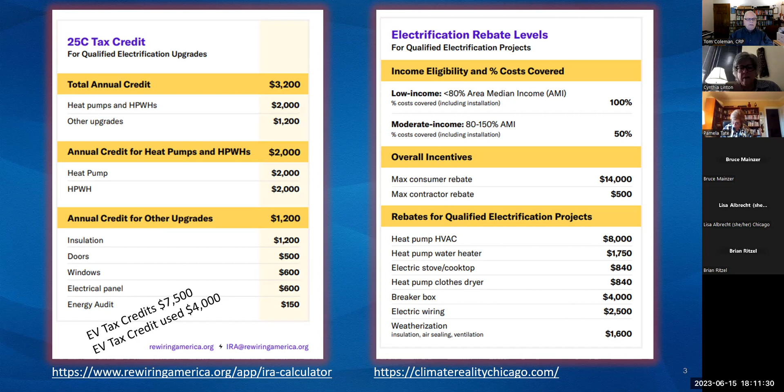Let me mention Chris Murphy as well. She's an expert on all of these things. I'm not sure she could be here tonight because I think she's doing a presentation. But when it comes to tax credits for heat pumps and things, in addition to what Derek and I will be talking about tonight, Chris Murphy can answer a lot of these questions. She's really good. So let's start with emissions.

You can see the breakdown as of 2021 from the EPA, with residential and commercial home buildings at 13%. Actually it's higher if you take the electricity generation and apply it to buildings—I think it takes it up to around 35%. So your home is critical. Your car is critical at around 29%. And electric generation is huge, and industry and agriculture, of course, is huge.

The real important thing about agriculture is that it has the capability, along with agroforestry and things like that, to be a sink instead of a net emitter. We want this to be able to capture some of the emissions from other areas.

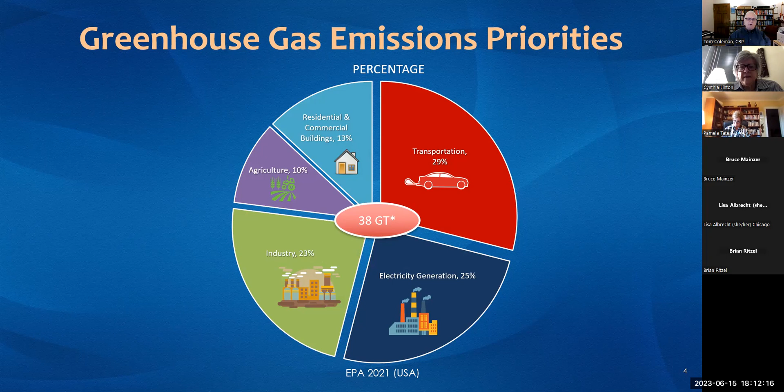So with that said, this is a breakdown of your home. You can see 29% for heating energy use, 17% for cooling—so you can see it's huge. Water heating 14%, appliances 13%, lighting 12%, other 11%, and 4% for electronics. So the home is huge.

So you think about planning ahead—what is it that you want to do next? I'm going to talk about 13 years worth of things we started doing in 2010. Hopefully you can plan it out better than I did, because many times we did things based on 'must have.'

But if your car is, say, 12 years old, maybe it's on its way out, you want to be planning for what you might do in terms of moving to an electric. Same thing with your stove and different things like that. So some of it's about what's urgent, the age of the appliance, whether it's gas or electric now. Should you do efficiency first, like insulation, windows and doors? And then when it comes to energy, do you want to do solar before your electric vehicle? We didn't do it that way, but it kind of makes sense to get off the grid, or mostly off the grid, with solar first, and then move your electric car onto that.

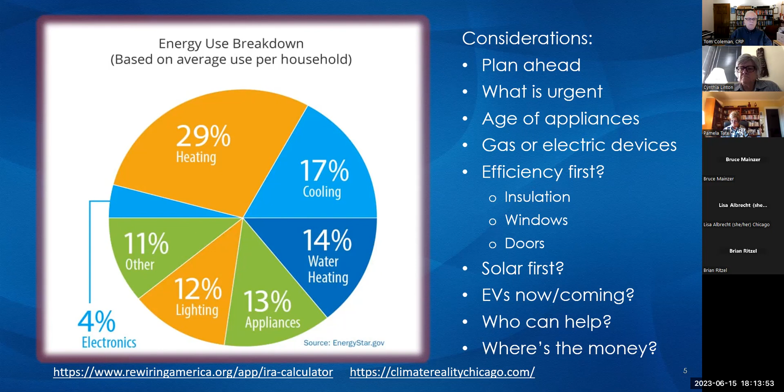Who can help? Well, obviously I can help, and Derek and members of Climate Reality can help. Certainly Christina Murphy is an expert, but also Rewiring America. I'll get the link at the bottom. We'll get these slides out to you, and Climate Reality.

So our 13-year transition kind of looked like this. In 2010, we replaced 20 windows in the house with Windows World. I've got mixed feelings about that company, but we did it, and it was important. Light bulbs up to LED.

We did a plug-in hybrid in 2011, a Chevy Volt. The good news about that is it cuts emissions almost in half versus a gasoline car. So that was a really good move in 2011.

And in 2017, I went to a zero emission vehicle. Basically we call them EVs, but there's a little difference between plug-in hybrid and zero emission. That was a Chevy Bolt EV. It was a very cost-effective vehicle, less than $40,000 at the time, and now they're like less than $30,000, or around $30,000.

We did shower heads in 2018, insulation. We had a home energy audit. The north side of our house was just leaking heat, and obviously air conditioning was just terrible, through the roof. We put cellulose insulation in the walls, some of the walls, and certainly in the attic. That was critical. It was so bad in our house.

Our house is from 1989, but they put cheap things in houses many times, really to keep costs down, and you pay for it over the long term. For example, we have a bath upstairs, and routinely the water would freeze in the drain. That's how bad things were.

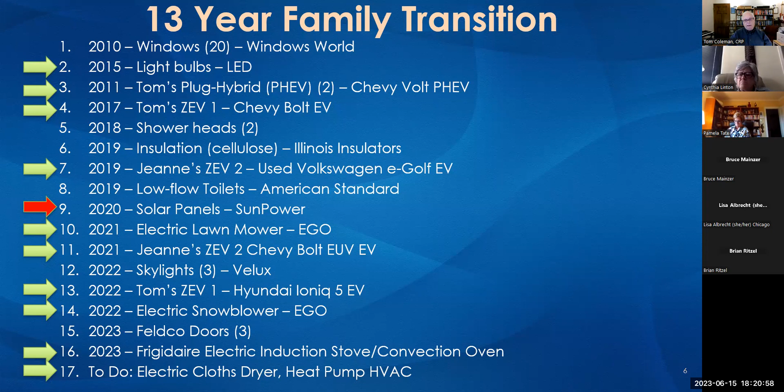So in 2020, when I found out about that, I was very upset. I wanted to save money, and I wanted to get off Naperville coal. I was going to wait around for Naperville to sign new contracts, which we're still waiting for. I wanted to get rid of as much of that as possible.

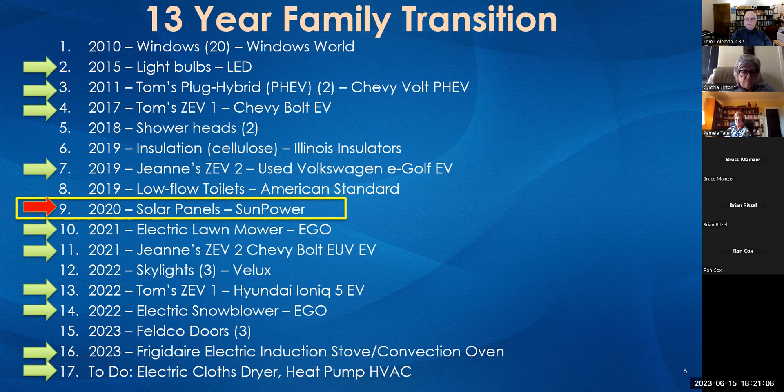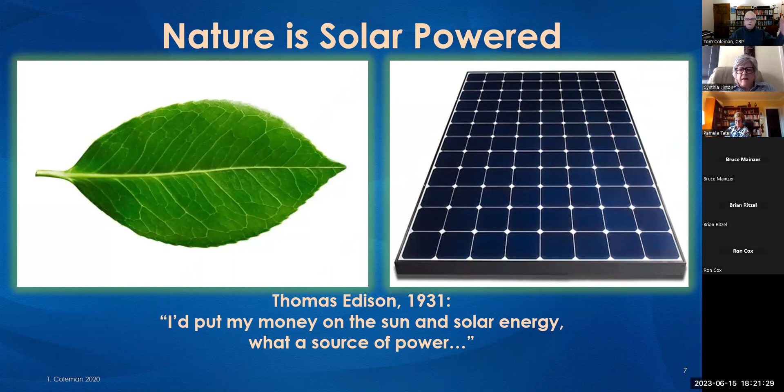So the thing I like about wind and solar, it's not just that it's renewable, it's very compatible with nature. So we look at a leaf, and then we look at a solar panel on the right, there's a lot in common there and a lot of synergy there versus drilling for fossil fuels and burning them and everything else. So I'll just say that.

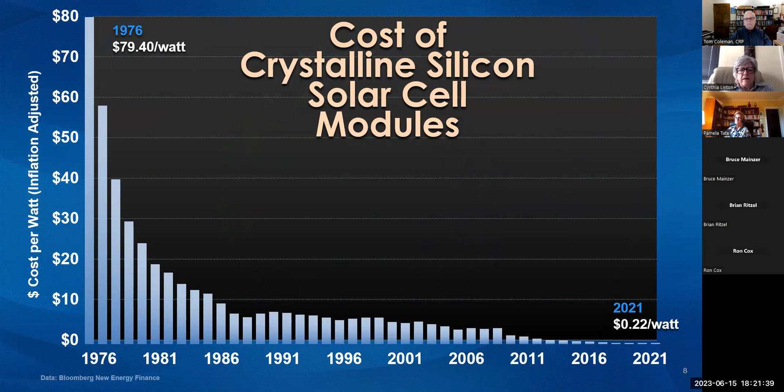And the cost of solar panels have dropped dramatically, as you can see in this picture here. So if you looked at them 5 years ago or 10 years ago, check it out again, because they're really coming down, and there's a lot of incentives as well.

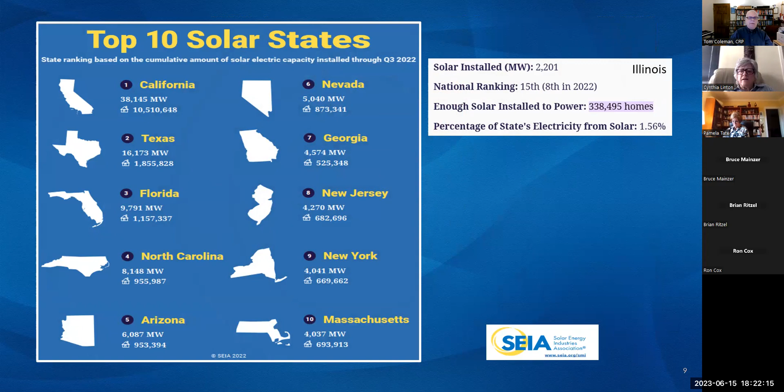And that's one thing that everybody worries about or is concerned about, money. So I think as a climate organization, yeah, we got to talk about climate, but I think we need to talk about money. And Illinois is like number 15 on the list. So we've got a ways to go to catch up to these other states that are moving right along.

Two approaches: rooftop solar and community solar. With rooftop, you can get 100% of your energy, certainly 70 to 95%, depending on your home and how much shade and tree cover you have, because trees will reduce the sun's power. Also, the way the home faces is important. Fortunately, our home faces east and west, so when the sun comes up and goes down on the other side, we have panels on both sides. Many of the things I talked about earlier help with home efficiency so we're not wasting energy.

Community solar, at the bottom, is an option if you can't do rooftop solar because of the way your home or trees are situated, and certainly you don't want to cut trees down. You can go many places for community solar and get about a 20% discount by sharing a solar farm. Now, in some places you can't do that. I don't think you can do that in Naperville because it's part of a muni, which is separate from a ComEd or an Ameren.

So check that out. Certainly it's better to go rooftop solar because a lot of people are concerned about the grid. Is the grid going to be able to take all the stress of going with electric cars and all of these kinds of things?

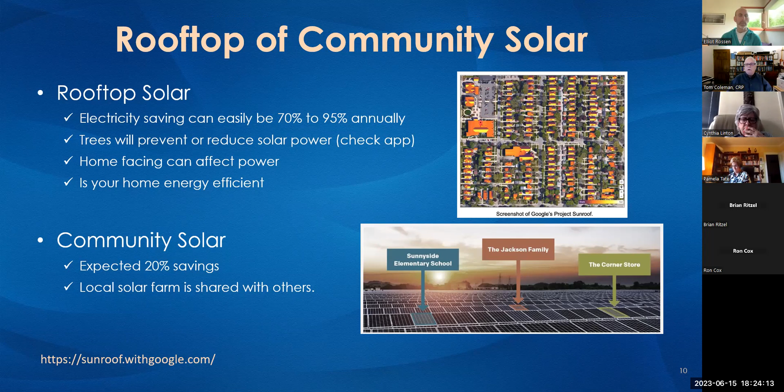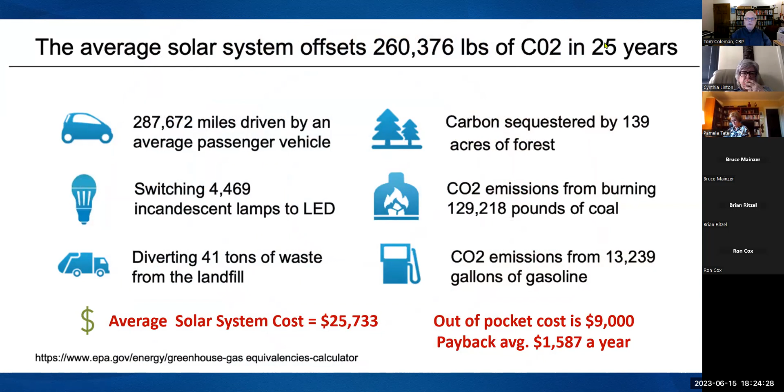With that said, the average solar system is going to offset about 260,000 pounds of CO2 over 25 years, and that's a lot. It's carbon sequestration equivalent to a massive 139 acres of forest, or emissions from burning 129,000 pounds of coal. You can see the statistics here, it's worth looking at.

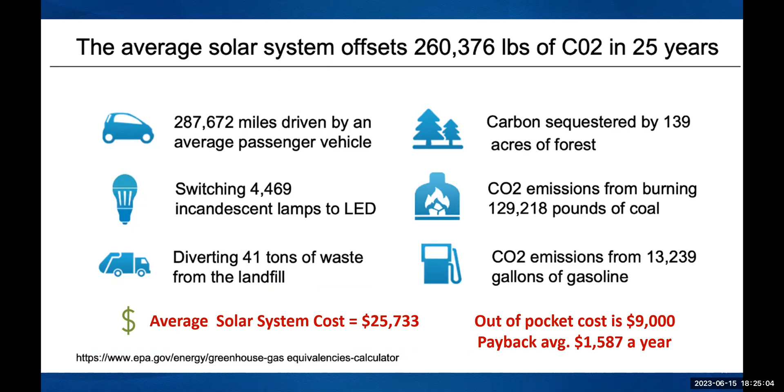A rooftop system is about $25,000, of which you might have to pay about $9,000 out of pocket. The average payback is about $1,500 a year, so it's about a 6 or 7 year payback. But the payback is gigantic as soon as you make the investment and do it. It's certainly similar to the investment of, say, remodeling a kitchen, but the good news is there's an ROI to it.

So how does this thing work? Well, you put the panel on the roof.

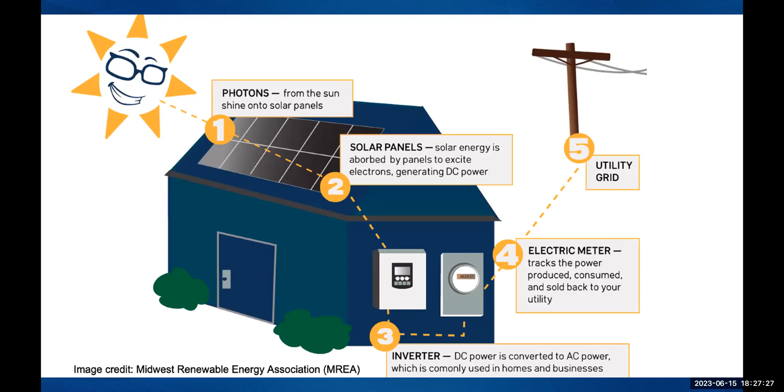This is from Christina Murphy, a system on the left where they only get 55% of their energy from solar. Let's say their upfront cost for that smaller system is $19,000. They get a $5,700 federal tax credit, and from Illinois, this thing called SREC, which is basically fronting you money of savings to help the state reach its energy objectives, about $6,900. There are also programs where you can get group buys, which I didn't do, but they exist. So their final cost, in this particular case on the left, is $5,900.

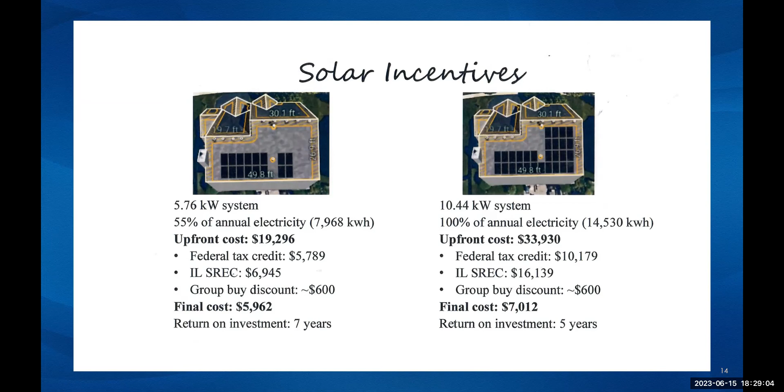So it could be you have trees or shade, meaning you can't get 100% of your power. On the right, this individual has a bigger system and is getting virtually all their power, except maybe in the evening, producing during the day. You can see their system is more expensive, but their federal tax credit, Illinois SREC, and group discount are all more. So their final cost is $7,000, which isn't a lot more than the house on the left. I think the house on the left couldn't do more because of how the house is, or trees. So obviously you want as big a system as you can get.

The process I went through looked like the top there. There's a home visit, you pick a company — it could be Lisa or some other company — and they do a site visit installation. They then do systems engineering and roof loading analysis, and prepare your municipal permits, because you need a permit. You have to wait for the permit, which took 4 or 5 weeks. Then the solar system was installed, and final inspection occurred. I didn't have to worry about the second row, HOAs, since we didn't have one. And submitting applications for connection, I submitted to the city of Naperville, which has its own power company. So it's really pretty straightforward.

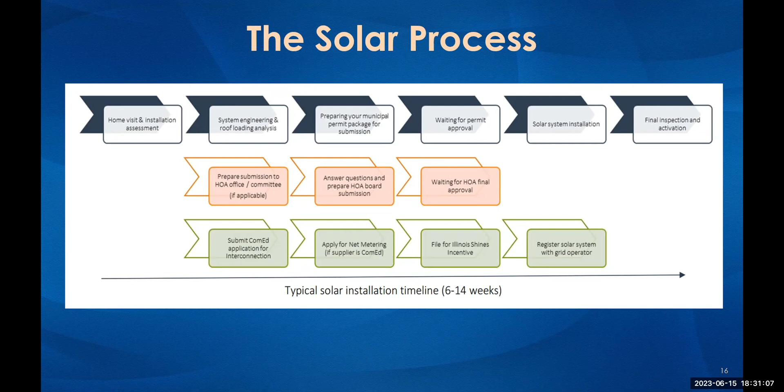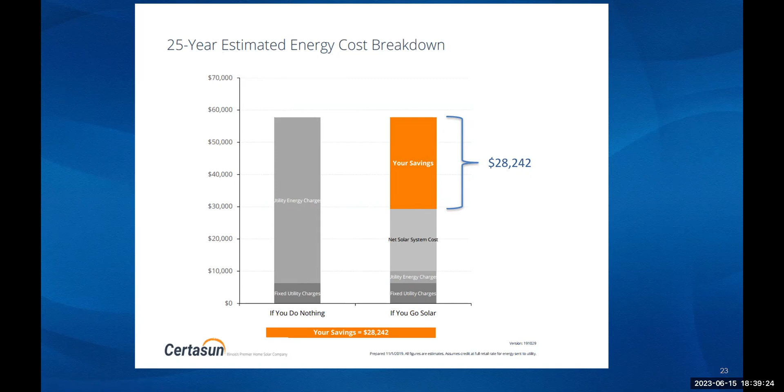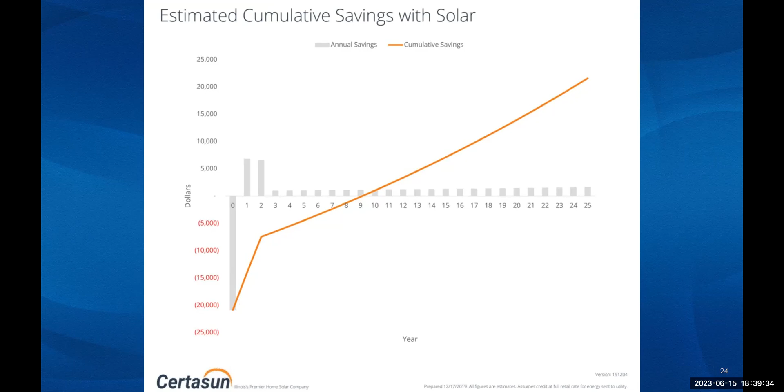And this is how much I spent. This is fixed costs you can't avoid. It was about $20,000 here in net solar system costs, which saved us over time about $1,200 to $1,300 or more a year. So the payback is around 6 or 7 years. The projection at the time this was implemented was about 8 to 9 years. Actually, I think we're doing better than that.

Now, unlike some cities, that $18 goes against my utility bill, so it pays for water and refuse and all of those things. In other places, it would be a credit against future months, and there would be a sync up at the end of the year.

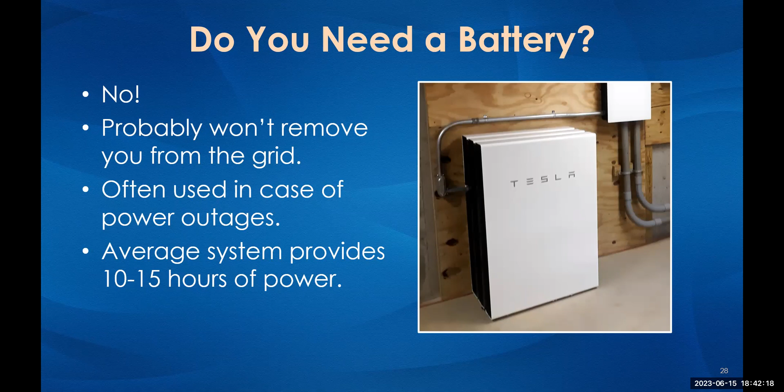Do you need a battery? Absolutely not. We don't. The city of Naperville has a highly dependable electric grid, so we didn't feel we needed it. We pull from the grid or we sell to the grid. But you can if you want to. Some people do that, and it does help for their power to actually get more, and it also helps during, say, a power outage. But it's probably not going to remove you from the grid, and it's good to be on the grid. If the grid were to go down, the systems would provide the batteries somewhere around 10 to 15 hours of power.

Can y'all see that? Yep. All right. Thanks, Tom. I think I recognize some of the faces here from when I was giving a talk back in January, so this is a follow-up to that talk. I included some of the content I talked about in January, just to follow through on it and help provide some context for what we've done so far.

So last time I talked about our process of installing solar panels, and then we had just begun the process of electrifying everything else, specifically the heating in our home. That's mostly what I'm going to focus on today, but it's great to hear Tom's experience, because it overlaps quite a bit with ours. So it's really good to hear that. It's validating. So I'll dive right in.

So I live in Oak Park. This is going to be a talk about heat pumps. This is just a little bit about me. I do data and tech work here in Chicago. I run a couple of organizations, a nonprofit called Chi-Hacknight, and I have a civic tech consulting company. And then in the last year I've joined the Oak Park Climate Action Network, which is how I think I know Pam, who invited me to speak back in January.

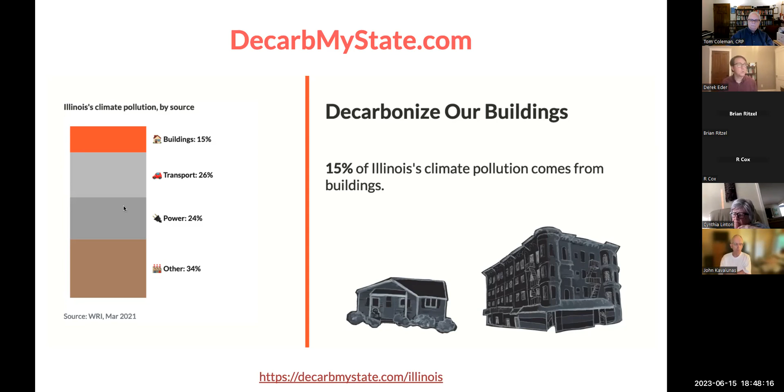But there's no one right way to do it. It also varies region to region. There's actually quite a lot of electric heating happening in the United States, especially in the southern parts of the country, and also in the Northwest, which I thought was surprising.

I've learned that especially HVAC professionals are really tried and true to natural gas. They love it - they think it's the best, nothing could beat it for reliability and things like that. So there's a culture there that we're up against.

Tom, you mentioned your HVAC installer talked you out of going with heat pumps - I've experienced that as well. I think a lot of that is just because of what's here. The numbers show it's not just the majority, it's something like 80 or 90% of at least Oak Park homes are gas heated. So there's a lot of work to do, and you look to your neighbor and they're probably using gas, so you feel like a bit of an outlier if you're trying to switch to electric.

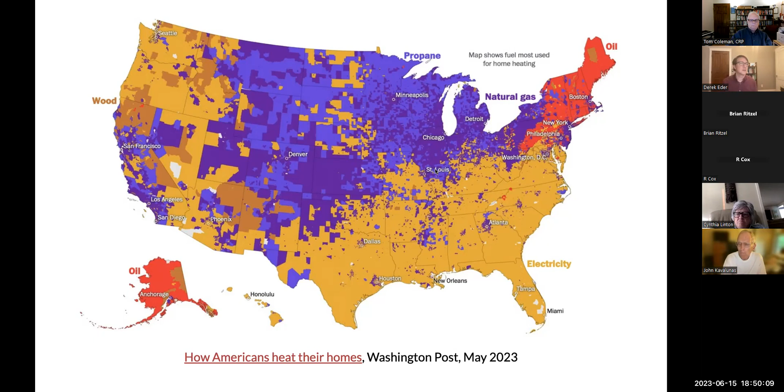But that is one of the challenges of our age, because everyone will have to. If we are actually going to get down to net zero emissions, we will all have to do what I've done and some of the things Tom's done. So it's worth putting that national context out there as well.

So again, I'm all about clean electrification, and you've probably heard this pitch before, but that's where I'm coming from. What brings me here is I've written several blog posts now, and as I've been doing this work on our home, I've been documenting it. All the things I'm talking about, I go into pretty detailed explanations of on my blog, on my website, derekeder.com. I'll share some links at the end along with these slides. But this talk is based on what I've already written about.

So I'm going to talk about heat pumps. It's first worth answering the question: what is a heat pump? A lot of people think it's just electric heating, and that's kind of right, but not quite right. Heat pumps don't generate heat - they move heat. That's a pretty important distinction because it's much more efficient moving heat instead of creating it. Your toaster, for example, creates heat - you see those little coils light up. That's electric, but it's actually really inefficient.

That's usually what people are thinking of when they say don't go electric, it'll be too expensive - they're basing it on electric resistance heating, which is essentially the same technology that powers your toaster or your hair dryer. Heat pumps are completely different technology. In fact, you probably already have one, you just maybe don't know it. If you have central cooling, an air conditioner, it's essentially using the same technology as a heat pump.

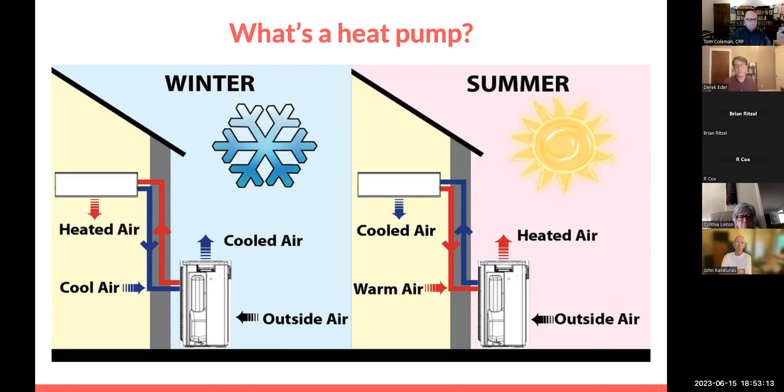For our home, they heat up and cool - it's the same device. We replaced our old furnace and air conditioning unit with just a heat pump unit that does both. So that's worth talking a little bit about what's going on here.

I've learned pretty quickly that heat pumps in Chicago are actually the hardest thing when it comes to electrification - the biggest challenge. I'll talk a little about why, at least for us.

This is our old furnace. It's a gas furnace, 125,000 BTUs an hour. I learned very quickly you can't just get a 125,000 BTU heat pump - they don't make them with that many BTUs residentially available. They keep getting better and bigger, but for now that just doesn't exist.

So we talked to some people and realized the first thing we had to do - and I talked about this last time - is put our home on an energy diet. We have to figure out how to reduce that number from 125,000 to something more manageable, because heat pumps come in sizes like 40,000 or 20,000 BTUs. Yes, I could have just installed 4 heat pumps right off the get-go, but that's an expensive proposition. There was some low-hanging fruit as far as efficiency that we were able to do so we didn't need that.

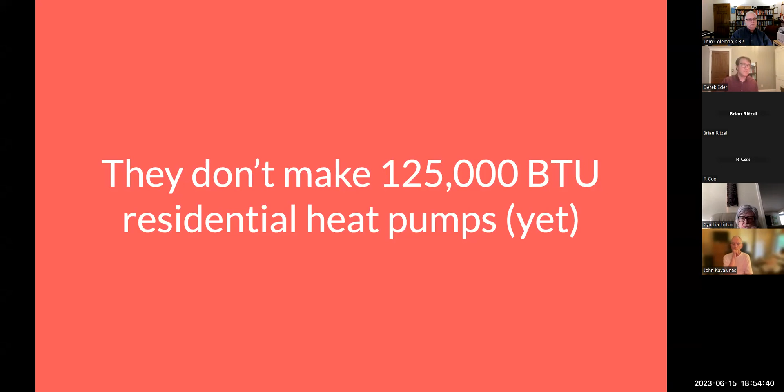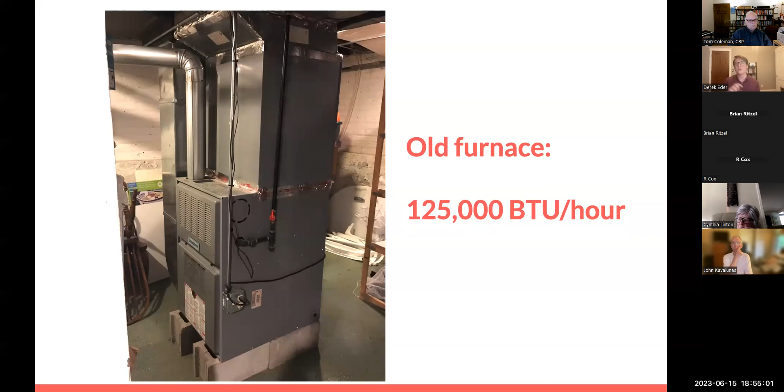It's also worth noting our gas furnace is 80% efficient, so right off the bat 25,000 of those BTUs are wasted. So our home actually only needed 100,000 BTUs. Heat pumps are very efficient, so you can essentially take their sticker value as their actual heating output, as opposed to a gas furnace like this.

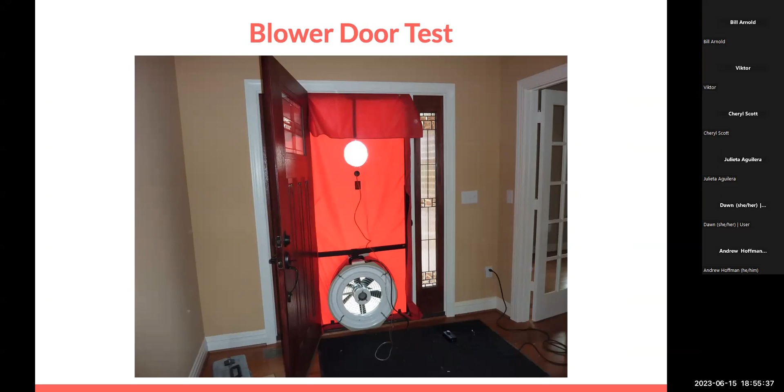The first thing we did to figure out how drafty our home was, we did a blower door test. This is a contraption they put up usually on your front door. They blow air and create a negative pressurized space in your home, which draws in the outside air and makes all the leaks in your home very observable - it heightens and exaggerates the leaks that are already there. Then they go around with a heat gun and infrared gun to identify spaces with leaks.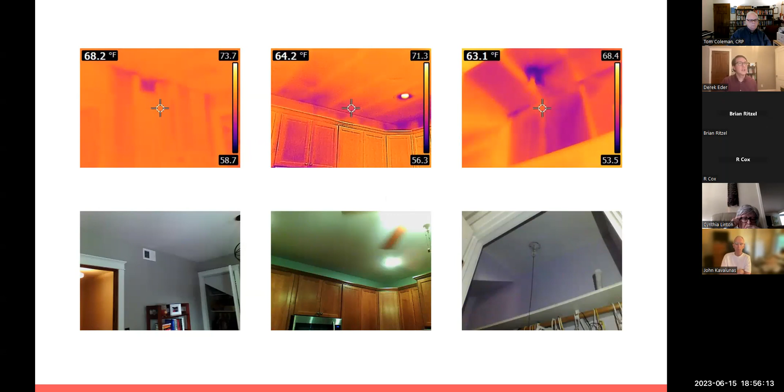Think about getting our home heated up to a livable temperature, especially during the coldest months of the year—8 air changes an hour, which is very inefficient. These numbers were very high. We have what's called a leaky home, and by comparison, tight homes are more like a third of that. So we had a long ways to go.

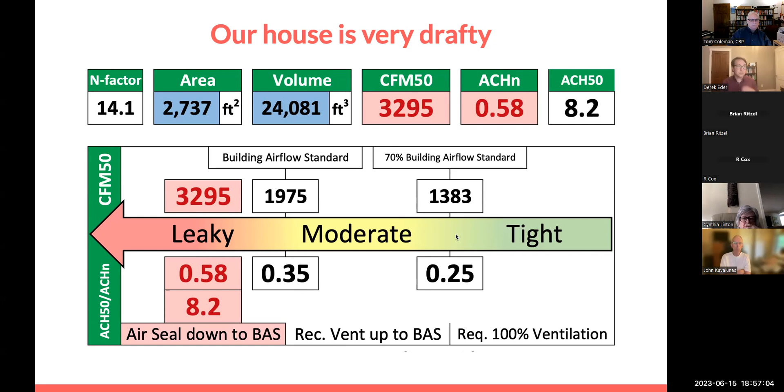So what we did was find an insulator. We used a group called Intelligent Energy Services—I'll have all these links in my blog. They went around and found there were places missing insulation. An entire panel in our kitchen had nothing there; our home is 100 years old, and whoever did the work back then just missed it. So they cut a big hole. This is one of the painful things about insulating—almost always they have to cut into drywall, which is kind of annoying. But they went in and sealed it all up.

They also air sealed our attic, and then found a few random places on our second floor that were just missing insulation.

I'll show you all the numbers and how much this cost in the end, but the process of completely doing all that insulating cost around $2,300, which, as you'll see from the other expenses, is a very small percentage of the costs for things—like a small heat pump is around $7,000. So just doing insulation really does make a huge difference.

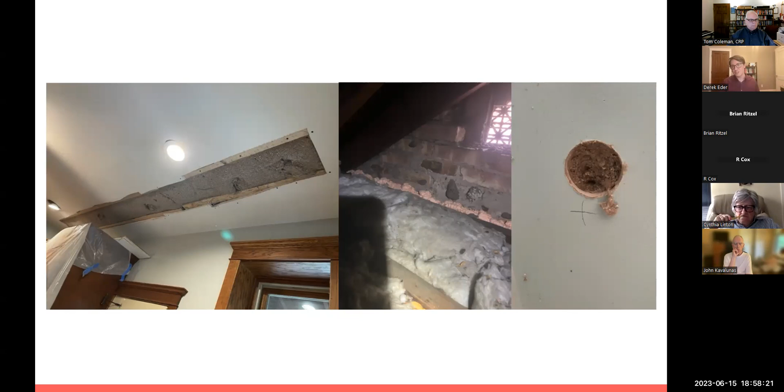For us it was noticeable—actually a 20% improvement in that score. That 3,000 number went down to more like 2,600, which was a huge improvement. It meant that over the 100,000 BTUs of heat, now we only need 80,000 BTUs. And that's even if we didn't switch to a heat pump or any other system—we're going to be using less energy anyway. So it's just a good thing to do on its own, to insulate.

So we did that and were really excited about it. Then we hired someone to do drywalling afterward, which is pretty common. The second thing we did, and I think I talked about this last time as well, is a process called AeroSeal.

This is a picture of someone doing the AeroSeal process, not at our home but a different home. Ducts are sheet metal, and oftentimes there are little tiny gaps where air can leak out. In some cases you can lose a third of the actual air—it just goes into your walls, into places that aren't useful.

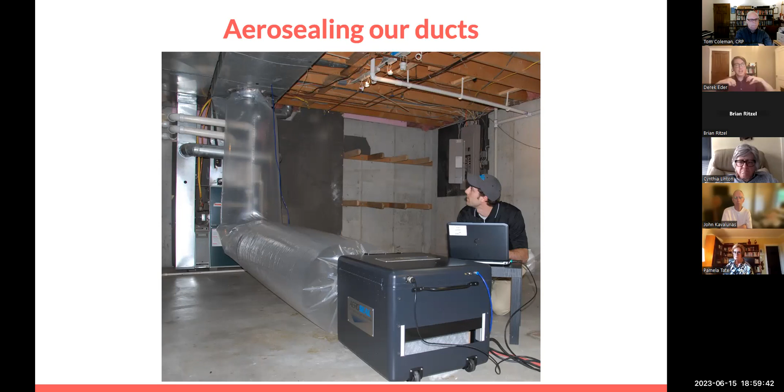So the AeroSeal process sends a non-toxic mist into your ducts, and it naturally finds the holes, congeals, and fills them up. This is the result of our AeroSeal process. It's one of those processes, just like insulating, where you can measure before and after and see its effectiveness. This is the live, real-time chart of the holes in our ducts being closed.

We had the equivalent of a 98 square inch hole in our ducts through the whole system, and that was reduced to an 8 inch hole. It was a huge reduction in wasted air, meaning our ducted system was going to be more efficient at moving air around. We felt the difference even before switching to heat pumps, especially on our second floor, which is furthest from the actual heating system. So we saw an improvement from there.

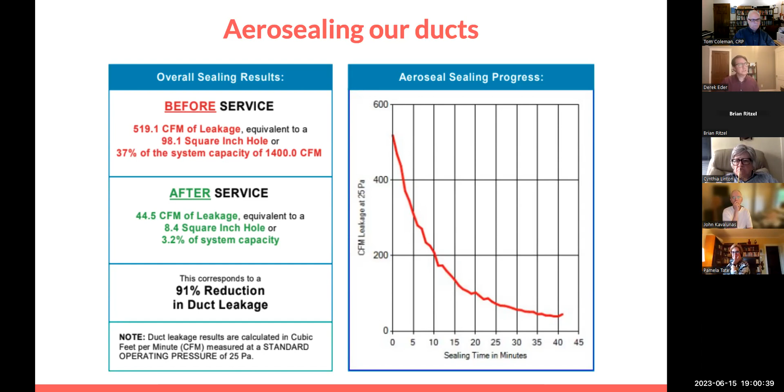So again, it's just worth it to do on its own. This process cost around $3,000, I want to say, and it took about 8 hours for them to do it. I'll show the pricing at the end. So we did those things, and it was finally time after doing that to do heat pumps.

One of the things that really resonated with me that you mentioned, Tom, was that the HVAC installers didn't want to do this. Several professionals, people whose job this is, told me it wasn't possible, told me it was going to be too expensive to run, or it wasn't going to be warm enough. I've learned that a lot of that is they just want to satisfy their customers, and they don't want to do anything new. They're naturally conservative when it comes to choosing what they're going to do. They don't want people calling them in the middle of winter saying the system you installed isn't doing well enough. So they stick with what they know, and what most HVAC installers know is gas, especially in this region. A lot of them just did not give me any confidence.

Actually that was what I was in the middle of when I gave my talk in January. I was feeling pretty dejected about it. It was discouraging, because here are people telling you the thing you want to do, the thing you're told is the right thing to do, is not possible. And it turns out that professionals can be wrong.

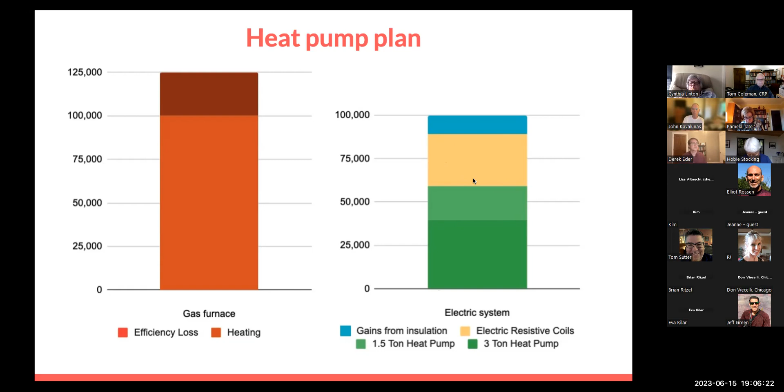We actually figured out a way to design it so that they only kick on when it's below 20 degrees - there's a system installed to ensure this. The system is smart enough to rely on the efficient part most of the time, and only kick on the less efficient parts when it really needs it in colder months. That's how we save that money and make sure we're always using the most efficient option, only using the inefficient parts when we need it.

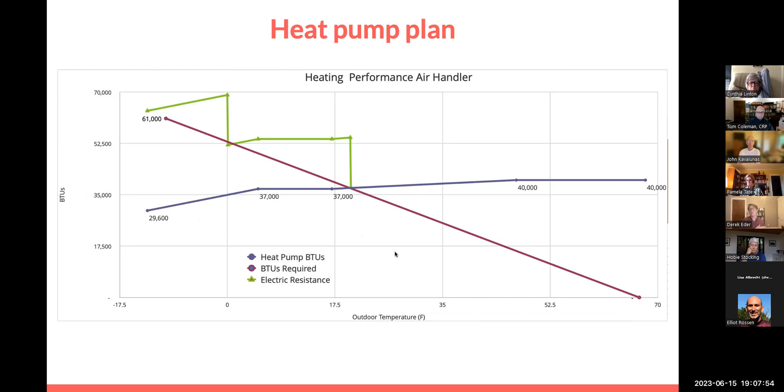They have kicked on, back when we installed it earlier in the year. We haven't done a full year - I guess that's the fourth disclaimer, we haven't made it all the way through a year yet. So I will certainly be writing about this and reporting back on how it's working, but it's working great so far.

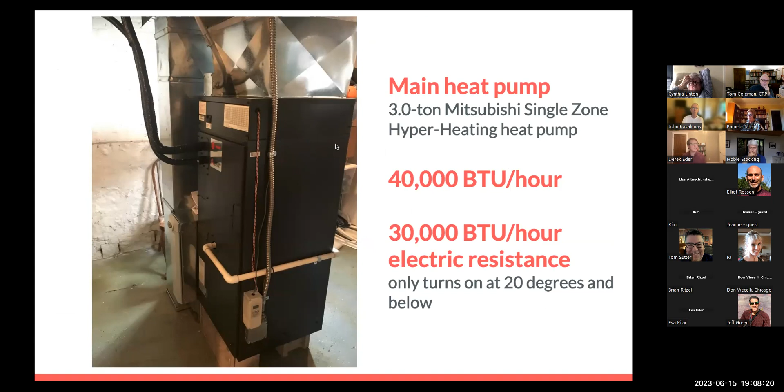This is the heat pump, the main heat pump we installed. It's a 40,000 BTU an hour system, 3 ton, Mitsubishi. And then those electric resistance coils are actually here, this piece here - it's just added in, and they work as one cohesive unit.

We also ended up getting a second heat pump because we wanted a little bit more heat pump energy. We also have a basement space that's not used a lot - it's finished, but mostly just where the kids play. So we decided to use this opportunity to create a 2-zone system. This system is for our living space, kitchen, bedrooms on the second floor, and this one is really just for the basement when we're down there, which isn't often.

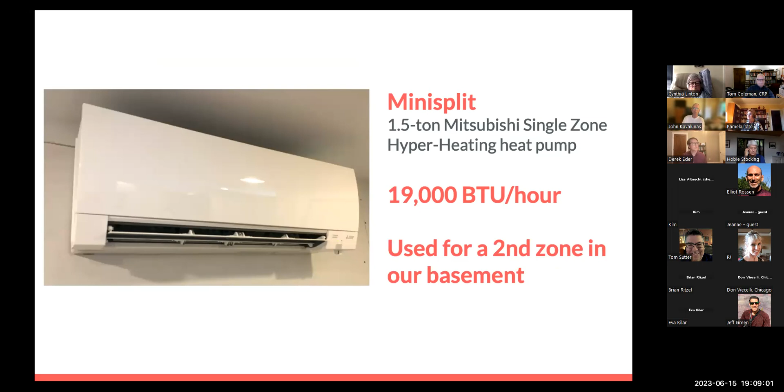So it was another way to save money because most of the time this thing is off. But it can turn on whenever we're down there, or if it's cold, we'll probably have it running in the coldest months just to keep things warm enough down there.

Each comes with a condenser - going back to why I was saying this is very similar to an air conditioner, this is actually the other piece to a heat pump. Each one has a condenser that lives outside and pulls in air from the outside and pipes that heat into the interior. So that's worth noting: if you install a heat pump, each one will have its own condenser, and that's something you have to calculate space for.

We happen to have space for it. These things are actually really quiet - both of them together are much quieter than the air conditioner condenser we had before. So they're very quiet. But going back to the scenario where we install like 4 heat pumps, this is where it gets ridiculous.

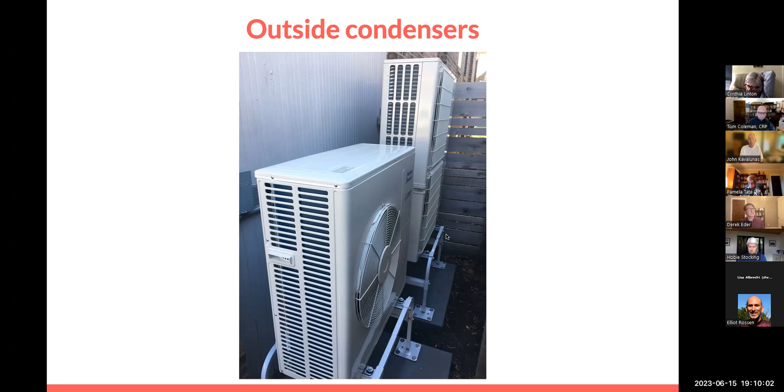I don't know where 4 condensers would fit in our backyard. That's why it's not really a viable path to go down. Sure, we could have had them, but we'd have condensers all over our backyard, and they're not the nicest things to look at. These happen to be tucked away on the side of our yard, as most are, but we really wouldn't have had much room to keep it hidden if it was a third or a fourth.

This is the cost of everything, again it's in my blog. We did the Aeroseal process - it was about $400 for the blower door, and the Aeroseal was about $3,000. The attic insulation was $2,500.

We actually got some rebates - a lot of contractors have to do rebates up front. Nicor Gas had a rebate that we were able to get, and then for the 2 heat pumps, each one got their own discounts from ComEd. There are other heat pumps that can get upfront discounts depending on your income from the federal government. We're going to get a tax break later of $2,000, but if you make below a certain amount, you actually get that up front instead of as a tax break. We also had to do some drywall repair.

So the total cost for this whole system was about $26,000. A way to think about this is our furnace was at the end of its life and we were going to have to replace it in the next year or so anyways. A new gas furnace equivalent to the one we had would have been between $10,000 to $12,000, so that's a cost we would have had to pay anyways.

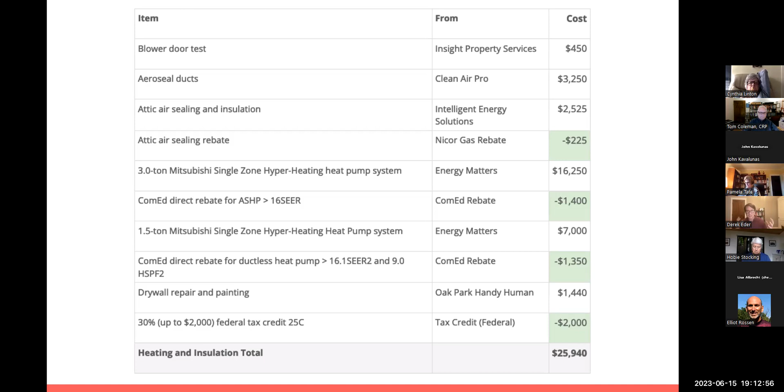Our old system was a single stage, so if you have a furnace you maybe know what I'm talking about - it's on, then it's off, then it's on, then it's off. It's sort of like 100% or zero, and that leads to pretty unequal distribution of temperature. The heat pump system is variable speed, so it's actually on constantly at a low level. Ever since we installed it, the temperature has been very evenly distributed in our home. It's been very comfortable, even in the spring months as it's been fluctuating a lot.

That was an improvement you couldn't put a price on - I'm not sure how much it would be, but it's certainly an improvement to our lives. Also, the filters on these systems, because it's cycling so much air, are much better than our old system, so the air quality in our home is noticeably better as well. Those are some other advantages to it.

These are the general lessons learned, just to sum them up. HVAC installers have a wide range of conflicting opinions - you should really just keep talking to them. I have a few that I liked that get it, that do heat pumps. You should find them, but you will find people that tell you this is not possible. I really wouldn't trust any HVAC installer that doesn't do a manual J calculation. Some will just eyeball it and say 'you need this' - they're guessing. I guess they're professionals, but they're guessing.

So you should really insist on the manual J. If they don't want to or don't know what that is, move on.

Insulation really does matter. Again, the cost of this was it's just so much less energy we're using, and we only paid a little bit of money in comparison to everything else. Going solar really helped incentivize us to electrify.

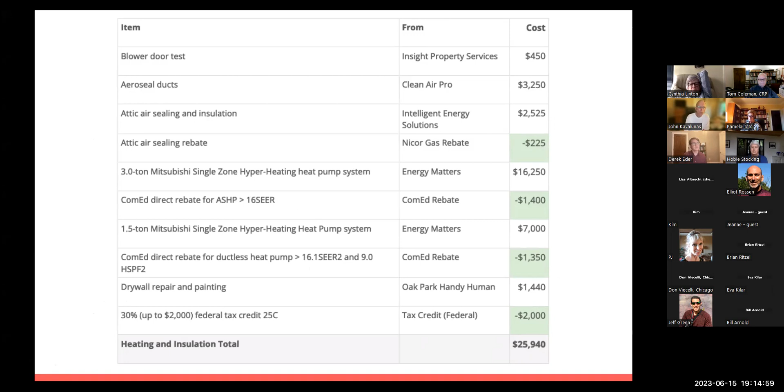One technical detail: if you only get this 30% credit, it's up to $2,000 for us in a given year. We could have spaced these things out over several years and gotten that $2,000 each year, but we just decided to do everything all at once. We did the hot water heater at the same time, and other things at the same time, so we could have spread it out. That's just something to know that's available.

So this is the list, and I'm actually going to be writing a third blog post soon, because now that the heat pumps are done, we've been able to do everything else. So our home is actually fully electric now.

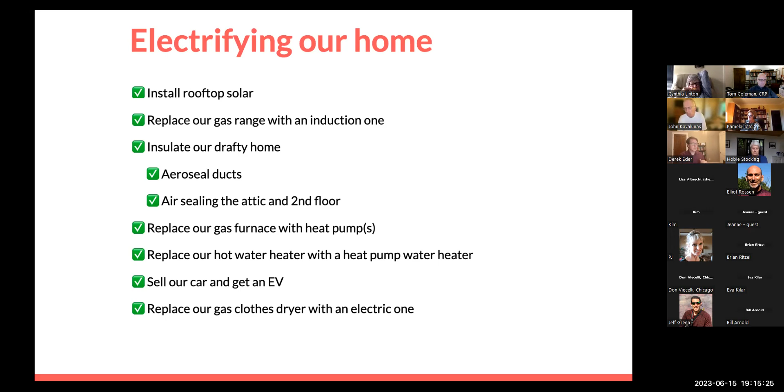We ended up, after getting the heat pumps installed, recently buying an electric vehicle. We replaced our gas dryer. We got an induction stove. This is a heat pump hot water heater that replaced our other hot water heater.